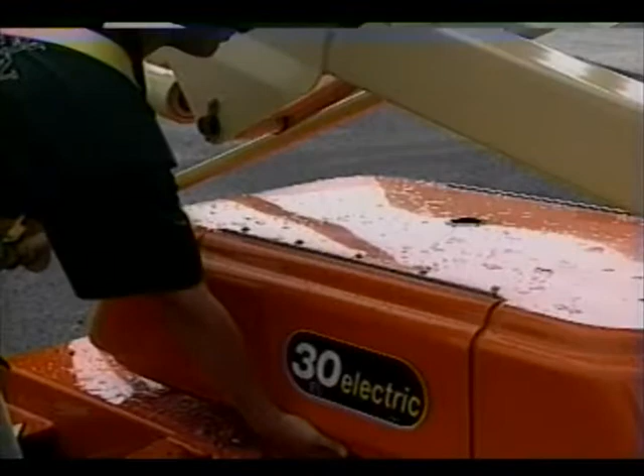This presentation does not relieve the user operator from the responsibility of obtaining, reading, and fully understanding the applicable operator's manual provided by the manufacturer. This manual should be located in a plastic compartment located on the turntable. If the manual is not available, one must be obtained and kept with the machine.

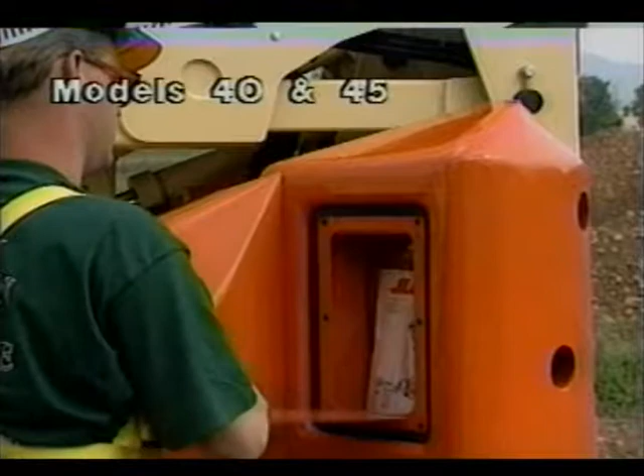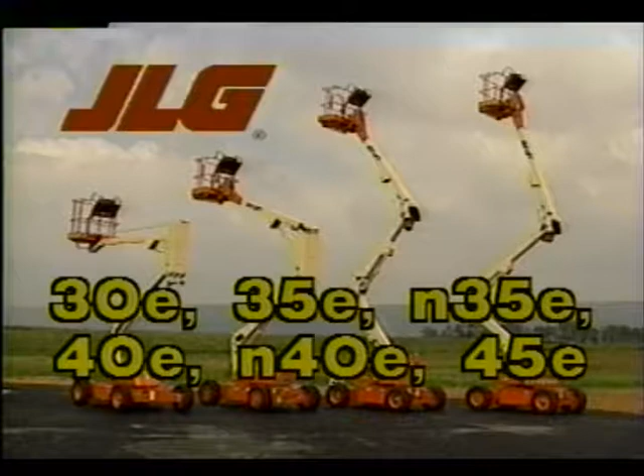JLG Industries Incorporated, manufacturer of JLG aerial work platforms, presents electric boom lift safety. We will cover operations unique to the 30E, 35E, N35E, 40E, N40E, and 45E series boom lifts.

The purpose of this presentation is to provide the operator with the operating procedures essential for the promotion of proper machine operation for its intended purpose. The operator of the JLG electric boom lift must not accept operating responsibility until instructed by a qualified person. The operator's manual has been read and understood, as well as having operated the JLG boom lift under the supervision

of a qualified operator. In addition, the operator and employer are responsible for complying with federal, state, local, or provincial rules and regulations covering the proper use and operation of this JLG product. If there is a question on application and/or operation, contact the Product Safety and Reliability Department at JLG Industries Incorporated, area code 717-485-5161.

We'll break this presentation into several parts. This will include a daily walk-around inspection, controls and a daily functional check, electric boom lift operation, and safety precautions. Prior to the operation of the JLG electric boom lift, let's complete a walk-around inspection. These machines are representative of JLG electric boom lifts. Your lift may be a different model or series, but the inspection is virtually the same.

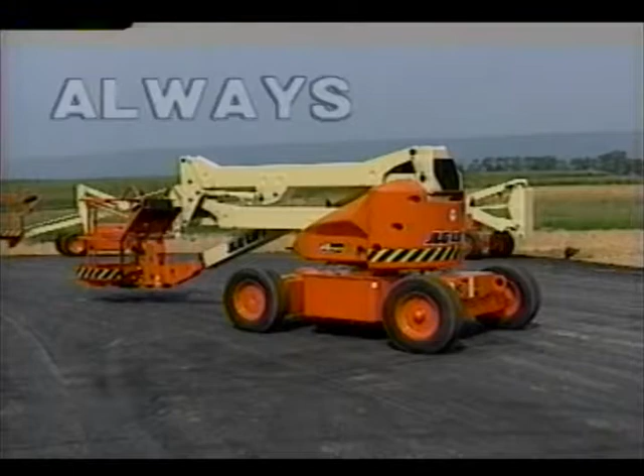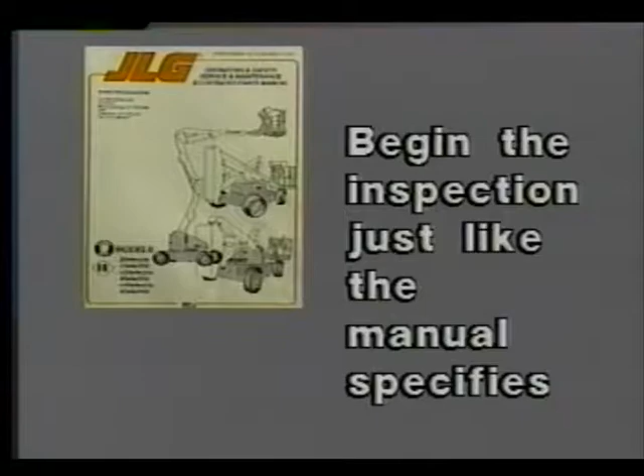The walk-around inspection must be a common practice with any safety-conscious equipment operator, and an equipment check will always be made before any use. A complete inspection procedure is outlined in the operator's manual, so let's begin the inspection just like the manual specifies. On each of the following items being checked, make sure that there are no loose or missing parts, that they're securely fastened, and that no visible damage exists, in addition to any other criteria we mentioned.

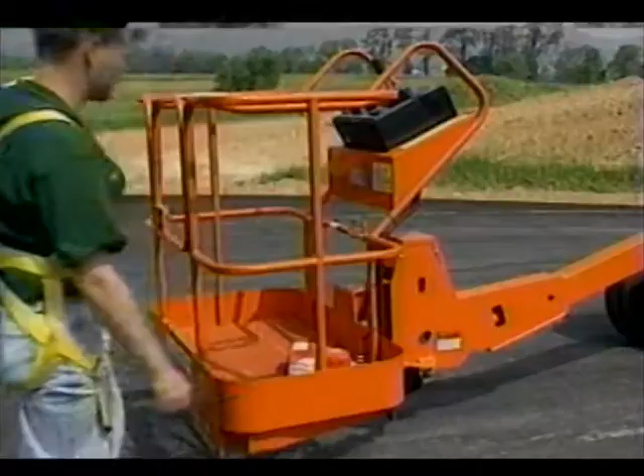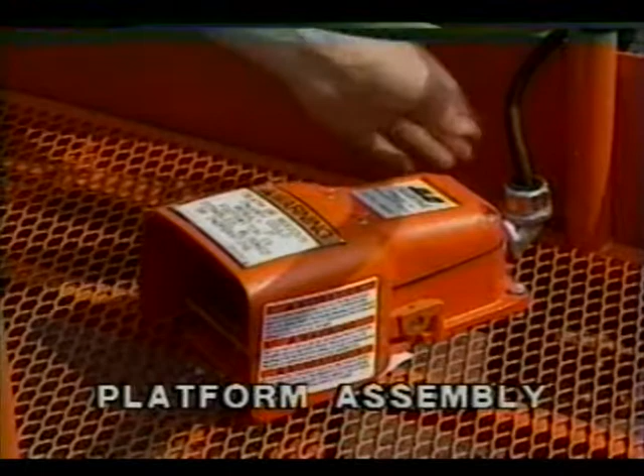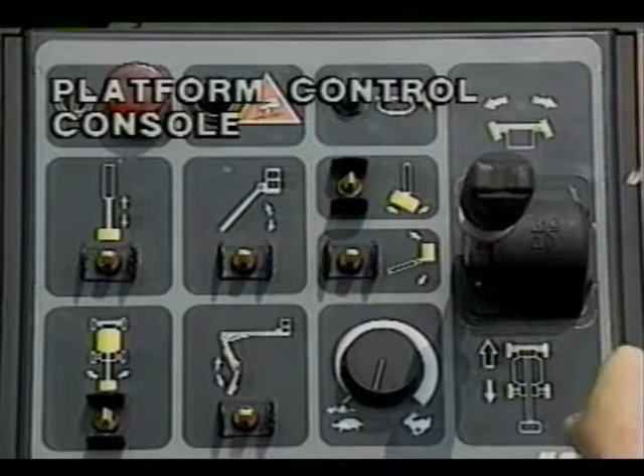The platform assembly and platform mounting pins. Make sure there's no visible damage. The foot switch is in good working order, not modified, disabled, or blocked. The platform control console, switches and control lever. Placards legible. The control lever and switches must return to neutral. The control lever lock functions properly. The emergency stop switch functions properly and control markings are legible.

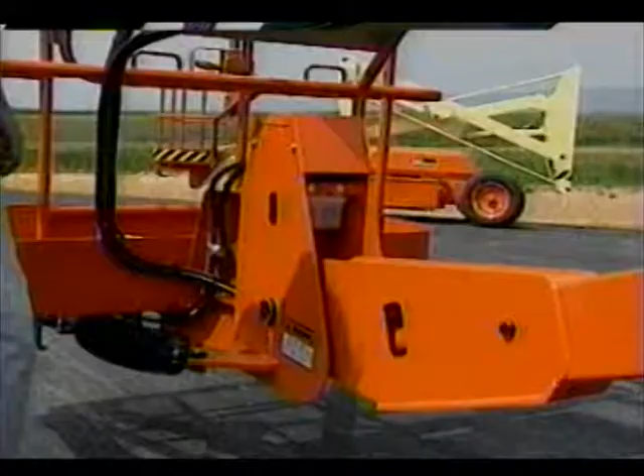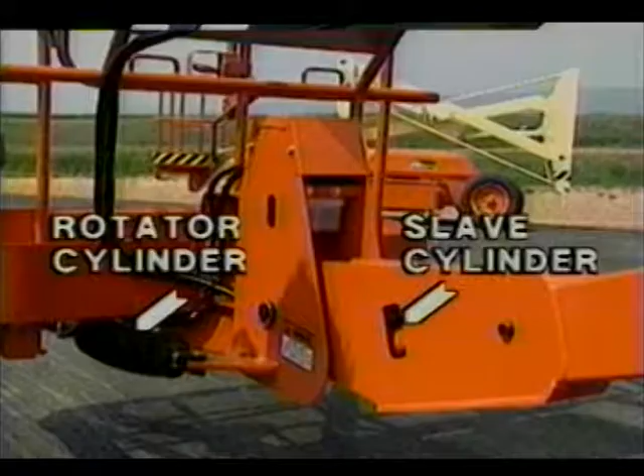The flyboom nose and platform support. Ensure this item is free of debris, obstructions, and other problems. The rotator motor and rotator cylinder. Check the motor and cylinder pins. The hydraulic hoses undamaged and not leaking. The slave cylinder. Check the pivot pins, barrel, rod, and hoses. Hydraulic hoses are undamaged, and hoses and cylinder are not leaking.

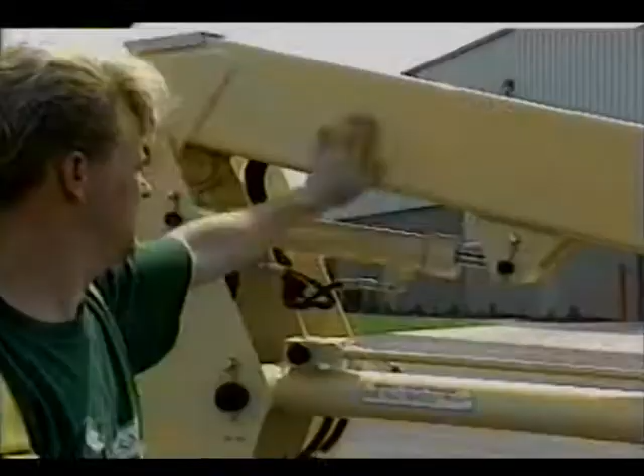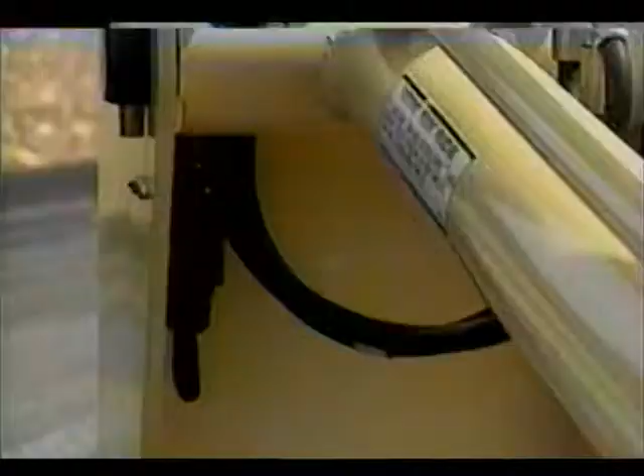Check the boom sections and lift cylinders and master cylinder. Check the pivot pins. Make sure the hydraulic hoses are not damaged and are not leaking. Check the telescope cylinder and power track. Check the limit switches. They must be operable. Check the drive motor, brake, and hub. There must be no evidence of leakage.

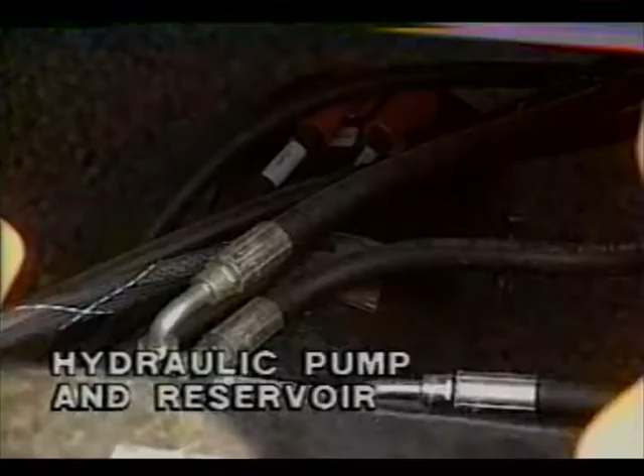Check the hydraulic oil filter housing. There must be no visible signs of leakage. Check the hydraulic pump and reservoir. There must be no hydraulic leaks. Check the hydraulic fluid level with the system shut down and the boom in the stowed position. Make sure the breather cap dipstick is secure and working. The turntable bearing and swing motor worm gear. Make sure there's evidence of proper lubrication. No loose bolts or looseness between the bearing and the structure.

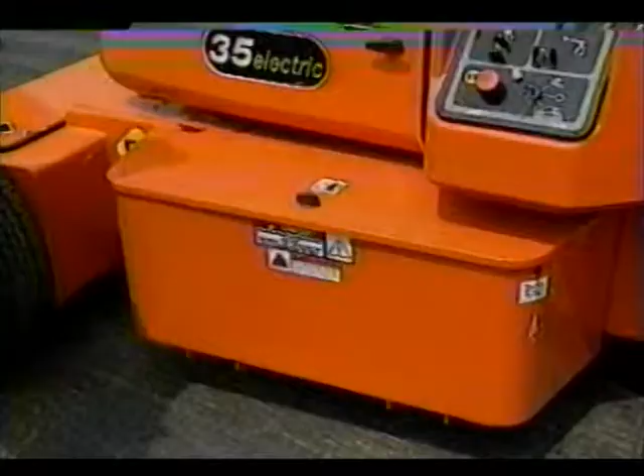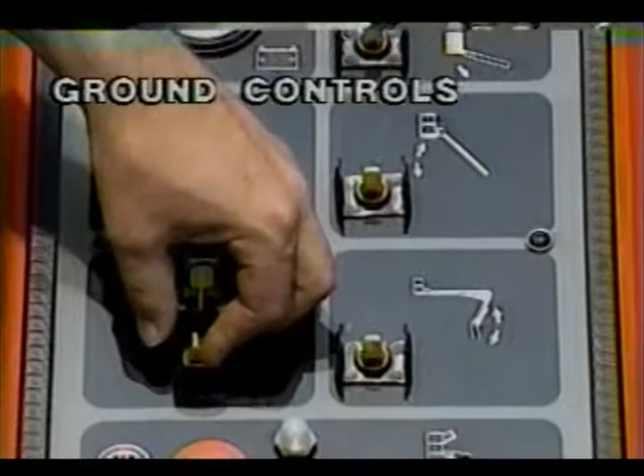Check the battery compartment. Batteries must have proper electrolyte level. The cable should be tight with no visible damage or corrosion. Check the cowling and latchings. All cowling, doors, and latches must be in working condition. Check the ground controls. The switches should be operable. Make sure the emergency stop switch functions properly. All decals and placards should be in place.

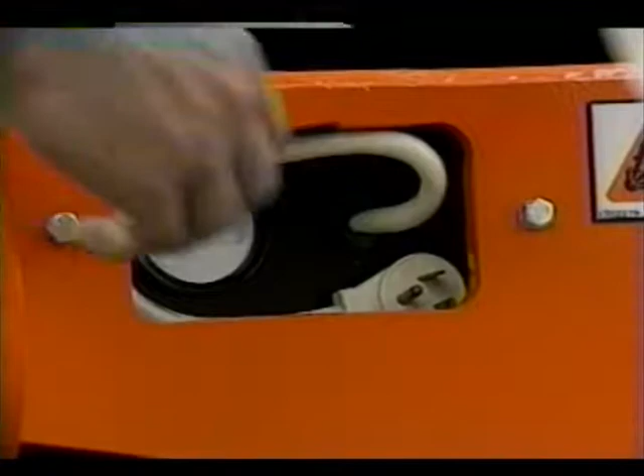Check the battery charger. There should be no visible damage. Check the wheel and tire assembly. There should be no loose or missing wheel bolts. If you find a cut, rip, or tear in the tire that exposes sidewall or tread area cords, measures must be taken to have the tire or tire assembly replaced.

Check the air pressure of pneumatic tires against the pressure stenciled on the side of the lift or on the rim assembly. Replacements must be the same size, ply rating, load range, and weight of the tire being replaced. Never replace foam-filled tires with pneumatic tires. Consult with JLG when replacing tires or tire assemblies with tires other than those supplied by JLG.

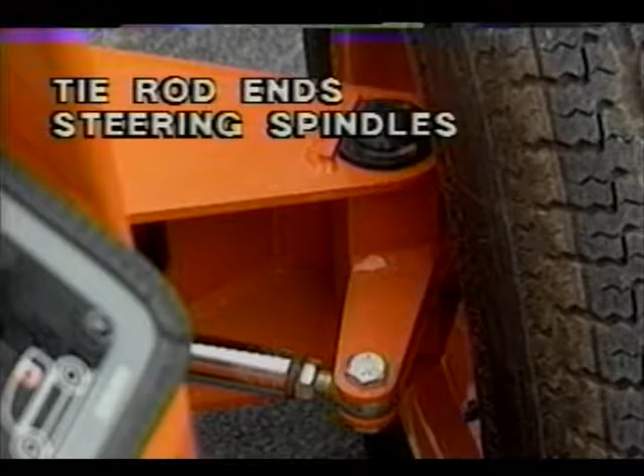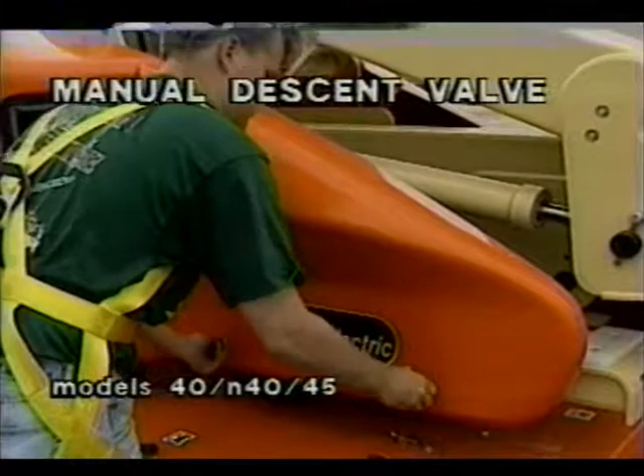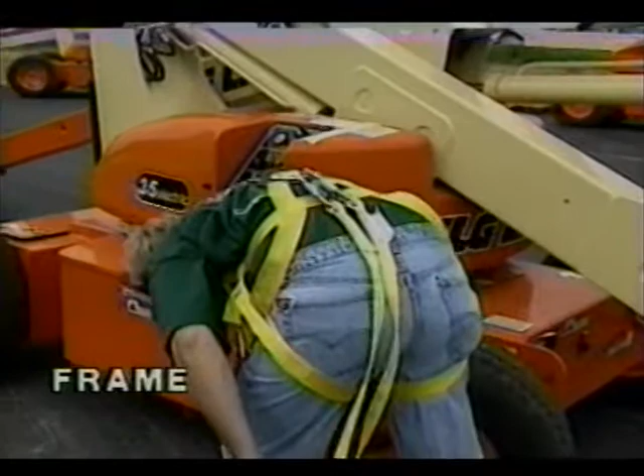The counterweights should be attached securely. Check the steer cylinder. There should be no signs of leakage. Check the oscillating axle, tie rod ends and steering spindles. Make sure they're secure with no visible damage. Check the manual descent valve. There should be no evidence of leakage. Check the frame. Make sure there is no evidence of any damage.

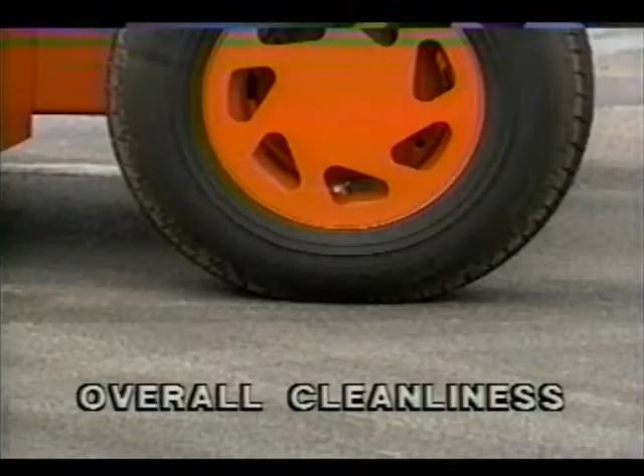In addition to the daily walk-around inspection, be sure to include the following items as part of the routine. Check overall cleanliness. All standing surfaces must have no hydraulic oil spillage or foreign objects. Check placards. Keep all the information and operating placards clean and unobstructed. Cover them when spray painting or shot blasting to protect their legibility. Ensure that a copy of the operator's safety and service and maintenance manuals, as well as the ANSI responsibilities, are in the manual storage holder.

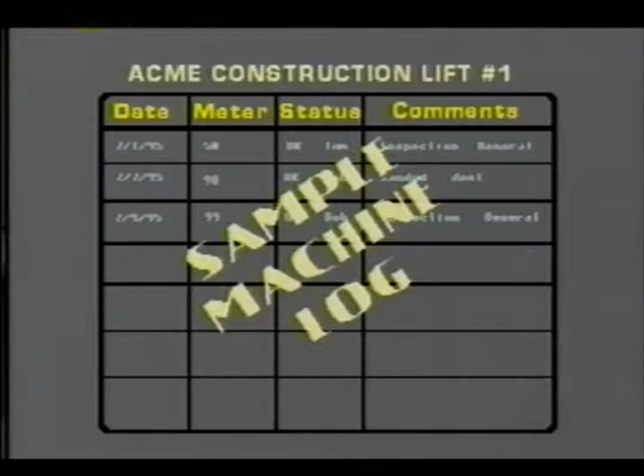Check the machine log. Ensure a machine operating record or log is being kept. Check to see that it's current and that no entries have been left uncleared, which may result in the machine being in an unsafe condition for operation. Ensure that all preventive maintenance, including lubrication, has been performed on the boom lift. Use the machine logbook and hour meter to determine the schedule.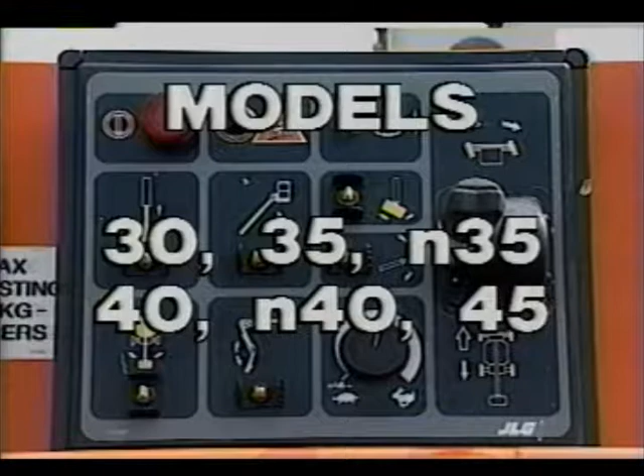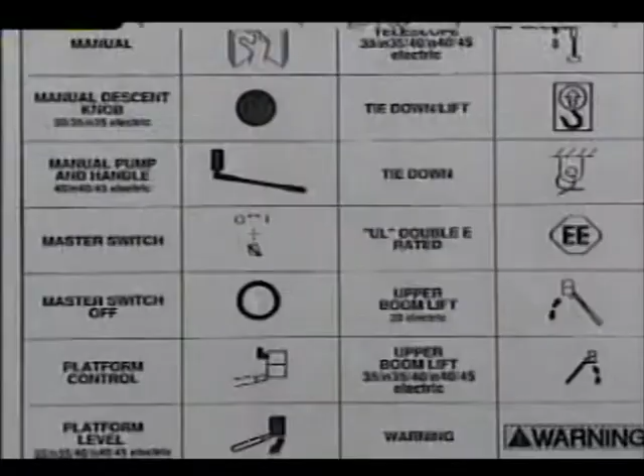The models listed on the screen are equipped with control panels that use symbols and words to indicate control functions. On some machines, the control panels may use symbols only. Refer to your operator's manual or the legend beside the control panel for a listing of these symbols and their corresponding functions. A functional check of all systems should be performed after the walk-around inspection is complete. The machine must be positioned on a firm, level surface in an area free of obstructions and overhead power lines.

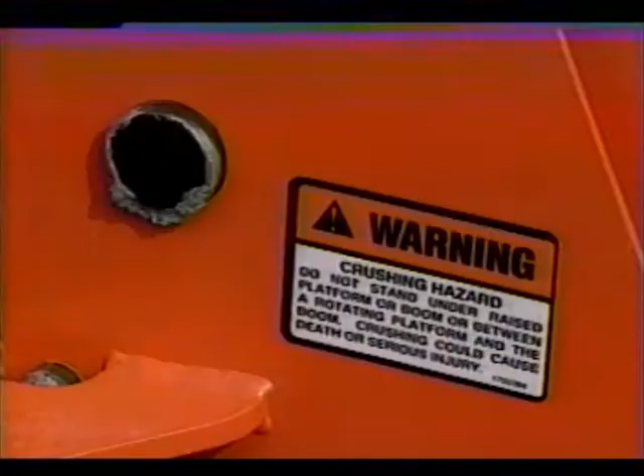Read and obey all warning placards and operating instructions on the boom lift and in the operating manual prior to operating. Do not operate the boom lift until you have done this. Before we begin to operate the JLG boom lift unit, we need to check that we have the proper personal protection equipment. JLG recommends approved headgear be worn by all operating and ground personnel. After all, your head becomes the highest point when operating a boom lift at all heights.

You're responsible for complying with all applicable laws and regulations, their exact wording and requirements as they apply to your work, and the personal protection equipment required to perform your work. Now, let's do a pre-operational check from the ground controls. Emergency stop. This is a two-position red mushroom-shaped switch that furnishes power to the platform ground select switch when pulled out. When pushed in, power is shut down to the platform ground select switch.

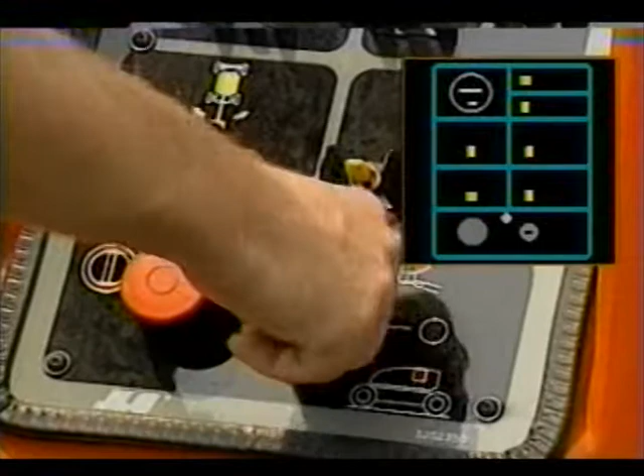The platform ground select switch. This is a three-position key-operated switch that supplies power to the platform control console when positioned to platform. With the key held in the ground position, power is shut off to the platform and only the ground controls are operable. When released from the ground position, the switch spring automatically returns it to the off position. When the machine is shut down, both the platform ground select switch and emergency stop must be positioned to off.

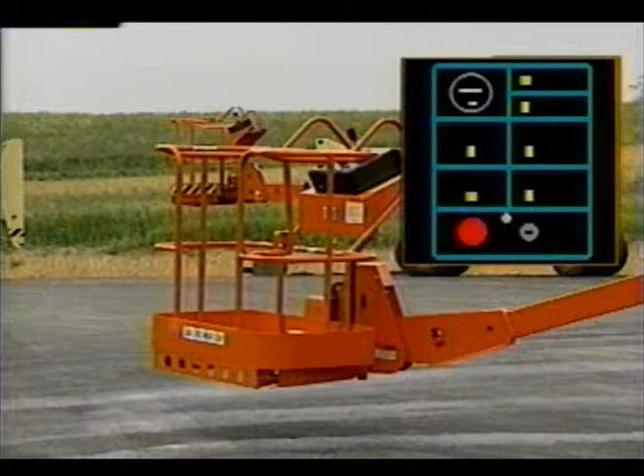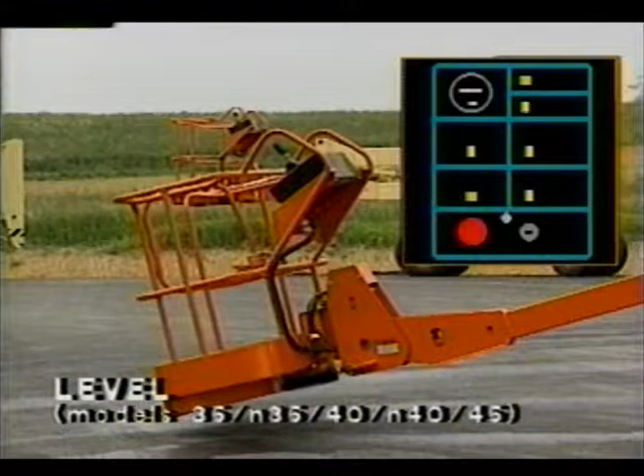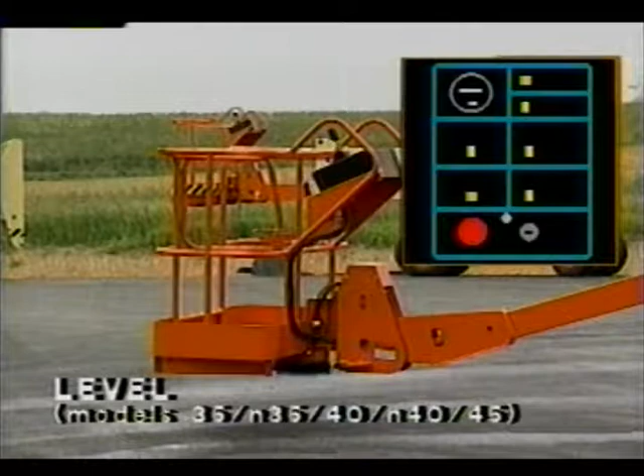Rotate. A three-position remote control switch that permits rotation of the platform when positioned to left or right. Level. This is a three-position level control switch that allows the operator to level the platform by positioning the control switch to up or down. Check that the platform self-leveling system functions properly during raising and lowering of the boom. Lower boom lift. This provides for raising and lowering of the lower boom when positioned to up or down. Upper boom lift. This provides for raising and lowering of the upper boom when positioned to up or down.

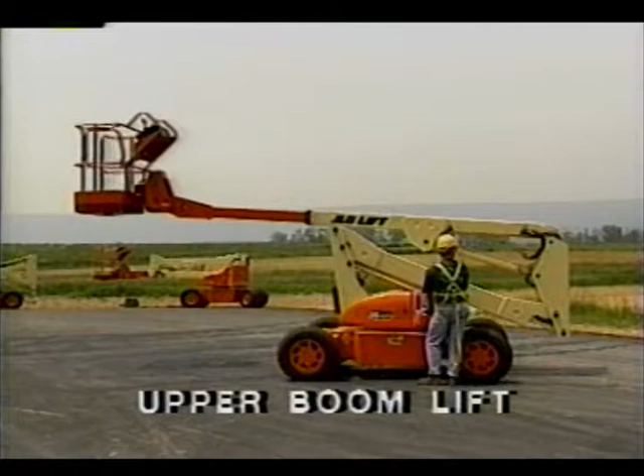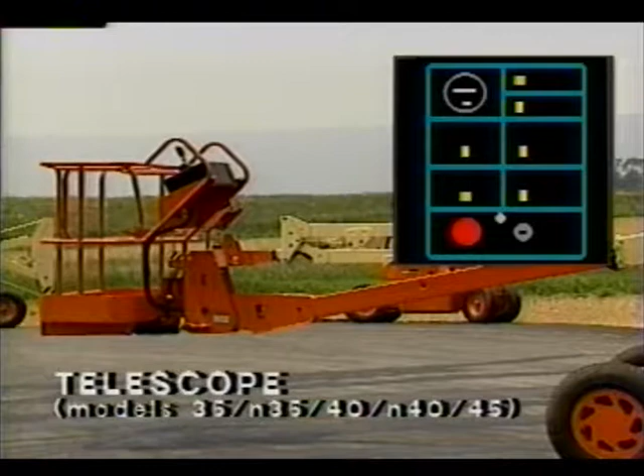Telescope. This provides for extension and retraction of the upper boom when positioned to in or out. Swing. The swing control switch provides 360 degrees non-continuous turntable rotation. To activate it, position the switch to the left or right.

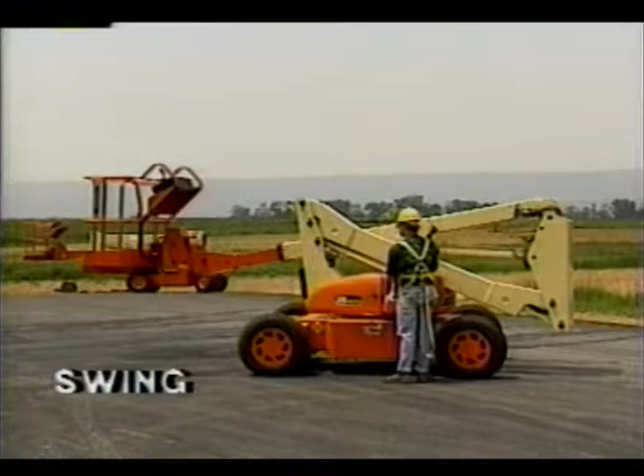The battery indicator and hour meter. This provides a visual indication of the condition of the battery's charge. The hour meter records machine operating time. Next in your procedure, set the emergency stop switch to the up or on position. Position the selector switch to platform.

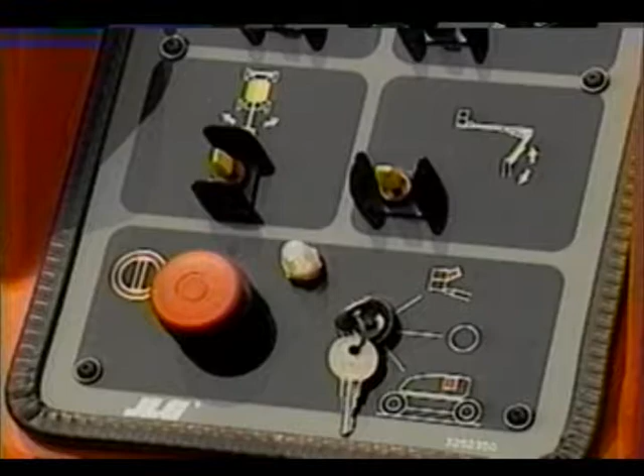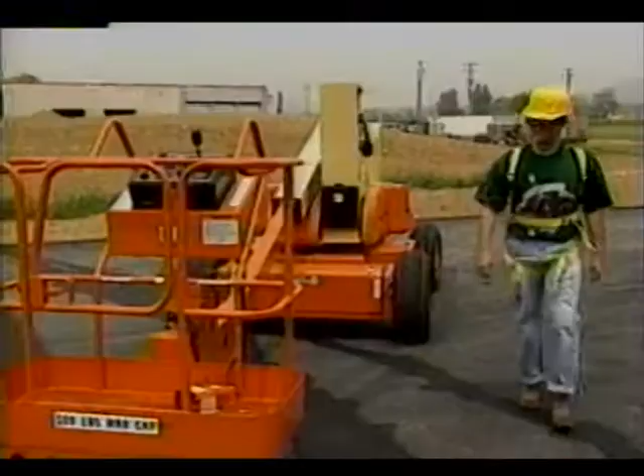Before we get to operate the machine, we need to check that we have the proper personal protection equipment. No operation is permitted without an approved fall protection device according to federal OSHA safety regulations. All personnel on the platform must wear an approved fall protection device with a lanyard attached to the platform attachment point.

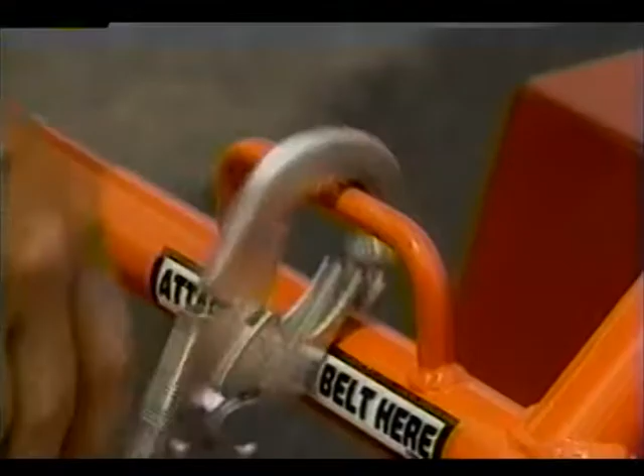Next, enter the platform using the approved procedure. Do not walk the boom to enter or leave the platform. Ensure the door is shut and securely latched. Attach the lanyard to the designated attachment point. Set the emergency stop switch to the up or on position. Now the machine is ready for operation.

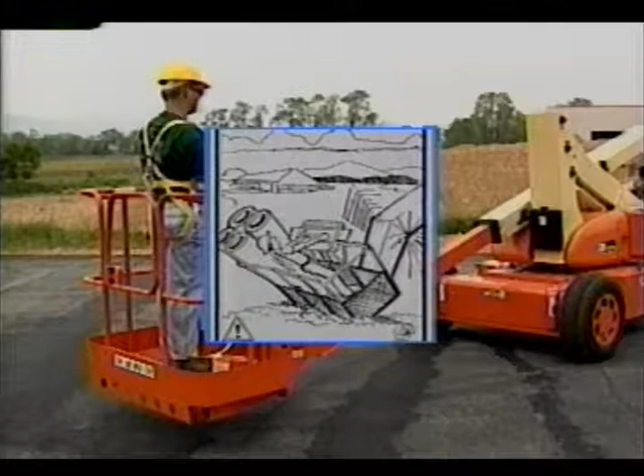The unrestricted capacity of JLG electric boom lifts is 500 pounds. This means that with a platform load of 500 pounds or less, the platform may be positioned anywhere the boom will reach. Know the total weight of yourself and your equipment before operation. Never exceed the rated capacity. Distribute the working load uniformly on the platform floor.

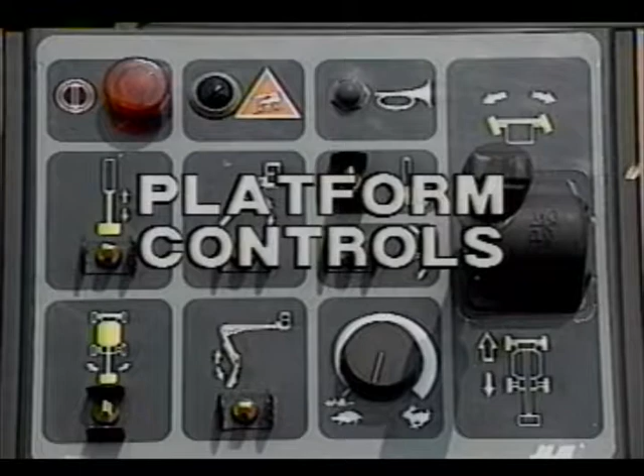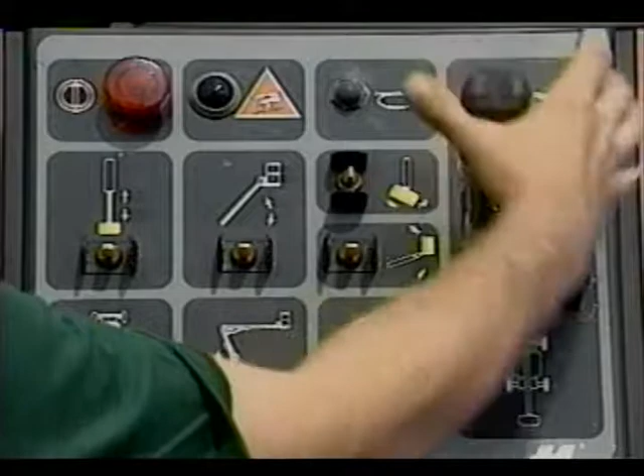Using the platform controls, check all the functions. Perform the following functional checks. Let's check the control lever and toggle switch operation before we start. The control lever is equipped with a detent lock, which prevents movement of the control lever when in the neutral position. The detent or lock must be lifted in order to move the control lever. When you release the control lever, it should automatically return to the neutral or off position.

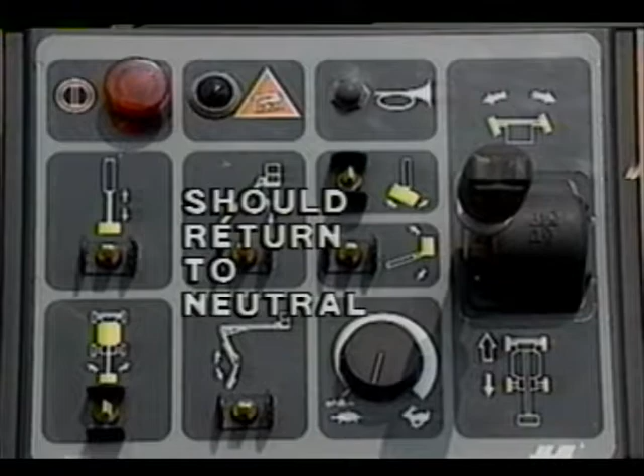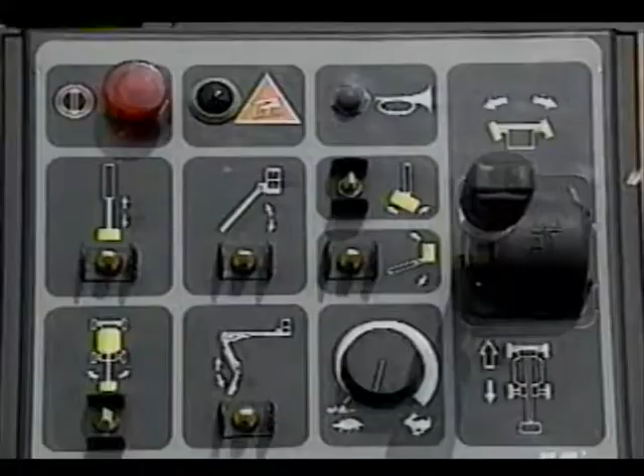The toggle switches should also return to the off position when released. Functions controlled by toggle switches are either on or off. Never slam a control switch or lever from neutral to the opposite direction. Always return the switch to neutral. Stop, then move the switch to the desired position. Operate levers with a slow, even motion.

The foot switch must be depressed before the boom, drive, or steer functions will operate. Otherwise, these functions will not operate. If the functions do operate without depressing the foot switch, do not operate the lift until repaired. Do not remove, modify, or disable the foot switch by blocking or by any other means. Operate all controls with your foot off the foot switch to make sure no functions are operational.

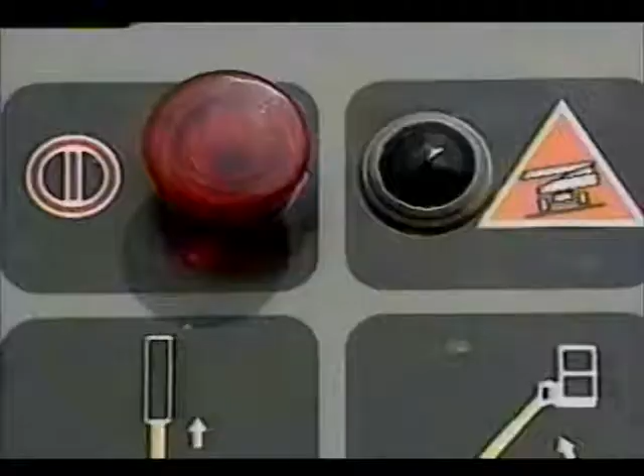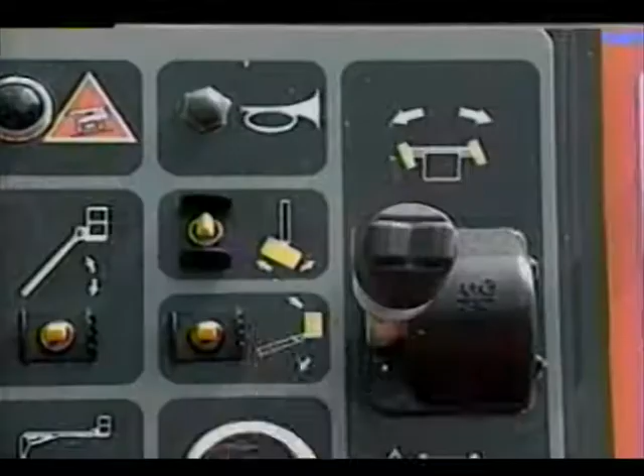The emergency stop switch is a two-position red mushroom-shaped switch that furnishes power to the platform controls when pulled out. When pushed in, power is shut down to the platform functions. The drive controller provides for driving either forward or backward when positioned to forward or reverse. The controller is ramped to infinitely variable drive speed between fast and slow. Positioning the steer control thumb-operated switch right or left enables steering the machine to the right or left respectively.

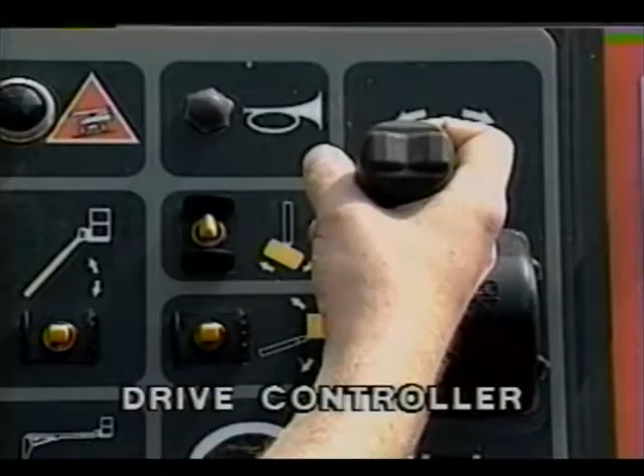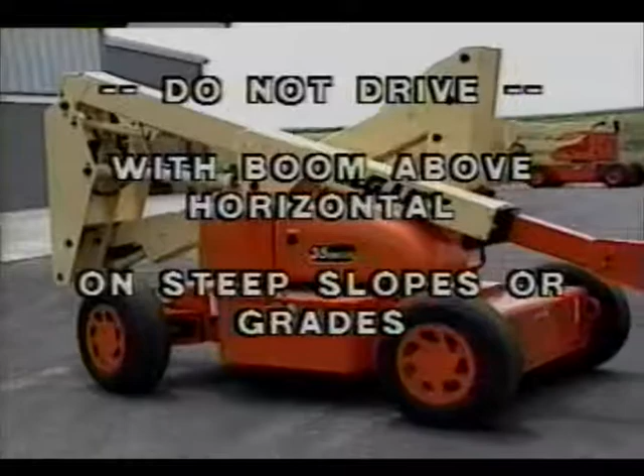When the lower boom is raised above horizontal or the upper boom is raised approximately 16 inches above the boom rest, the high drive function will automatically be in low drive. Do not drive with the boom above horizontal except on a smooth, firm, and level surface. Do not drive the machine on grades or side slopes exceeding those specified on the warning placard at the platform. Avoid any terrain which could cause the machine to tip over.

Use extreme caution when driving in reverse, when driving with the platform elevated, and when driving with any part of the machine within 6 feet of any obstruction. Check the directional markings on the frame with those by the drive controller. Before driving, make sure the upper boom is positioned over the rear drive axle. If the upper boom is over the steer wheels, steer and drive controls will move in an opposite direction to machine motion.